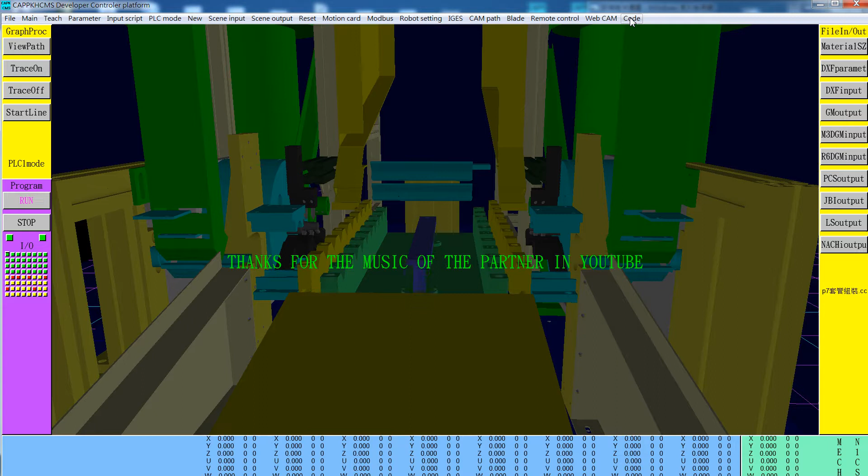Input script of a pure PLC mob assembly machine by teaching. Last time we were talking about

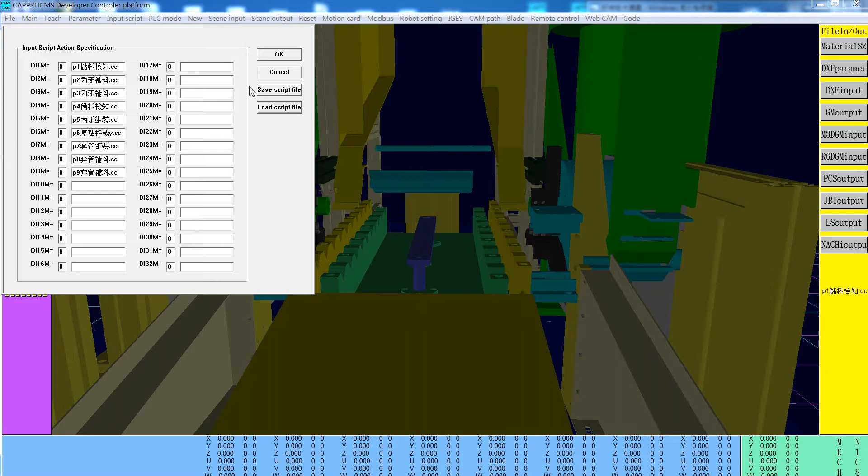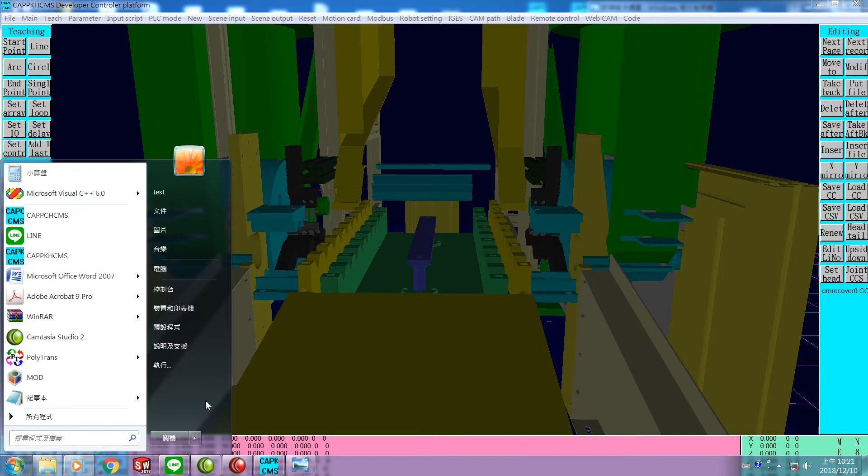We're talking about the P8 套管补料 CC file first. The number 8 control system. The script list down here, but we already output the Excel file. Let's see the Excel file as ASCII code, better for looking.

P8 套管补料 CC file combined with the cartoon chart is better for looking. The P8 is the 套管, the outfittings drop from the supplier.

And then Y17 will turn on to hold the position to prevent the dropping of the outfitting, and retract Y18 back to home position. Finish a cycle. Let's see the procedure of the script.

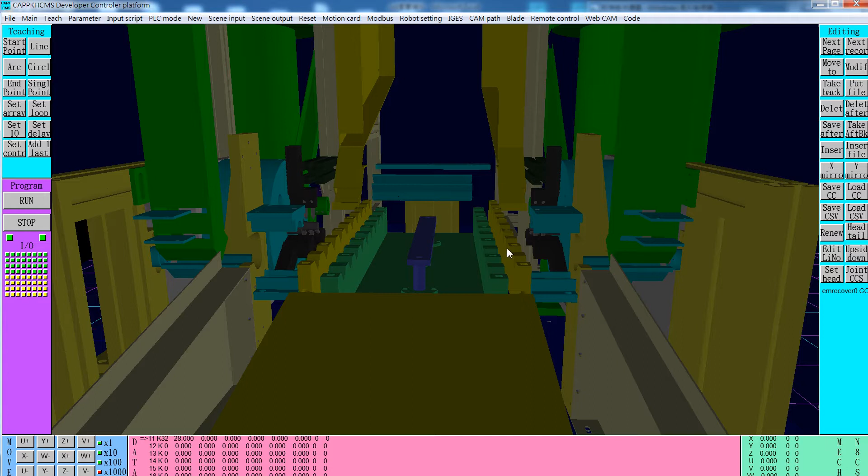But as we run it, the last one is the separating piston on. We have to, if we don't want to see this play at home positions, it's better to wait for a few minutes for observation. So we use delay to wait 5 seconds.

So you can see at the last this insert in position and after 5 seconds it will return back here. So let's talk the actions first. As running the script of P8 CC5, the cut with piston on, this one will go insert and this one will return back. In no time, this one will insert, will return back. This one will insert and wait for 5 seconds. This will go back home position as well. Okay, let's run.

5 seconds, return back. Okay, good. Let's see it again: this in, this return back. 5 seconds, this return back. This is what the P8 CC file does. Okay, let's continue to see

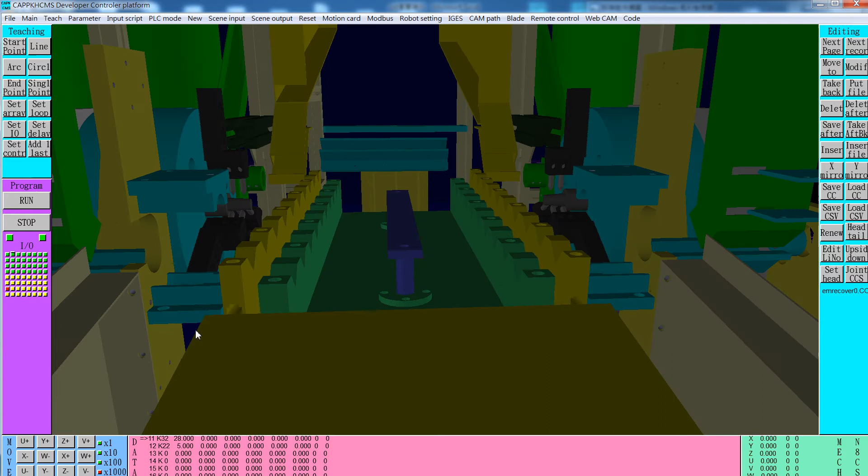the P9 CC file working. Now then, let's see the P9 casing material CC file together with the cartoon chart here. Let's say K21, the input 9 crossed,

and K20 open Y23 to cut the material, and K21 Y22 to cross the Y22. So the Y22 object will return back. This is object number 2, will return back to home position. The PLC control K20, 23, K21, 22.

For the 3D simulation, for this one, this object 1, use K26, object 1 moving minus 30 millimeters. Let's see. This direction is x minus direction.

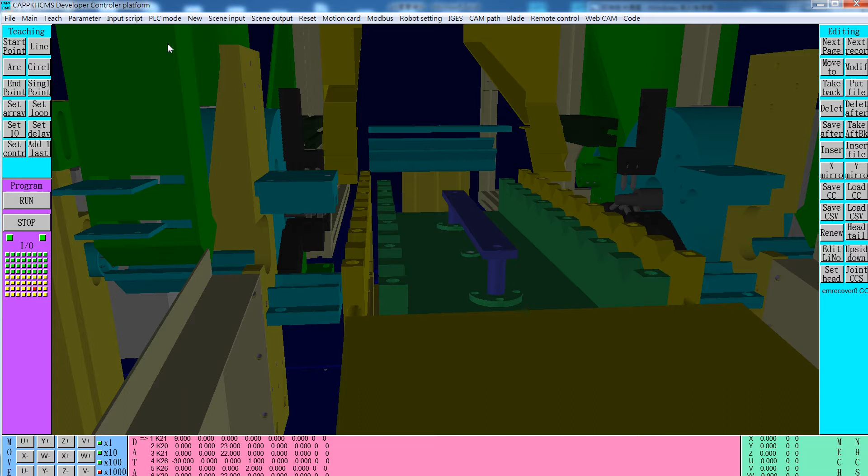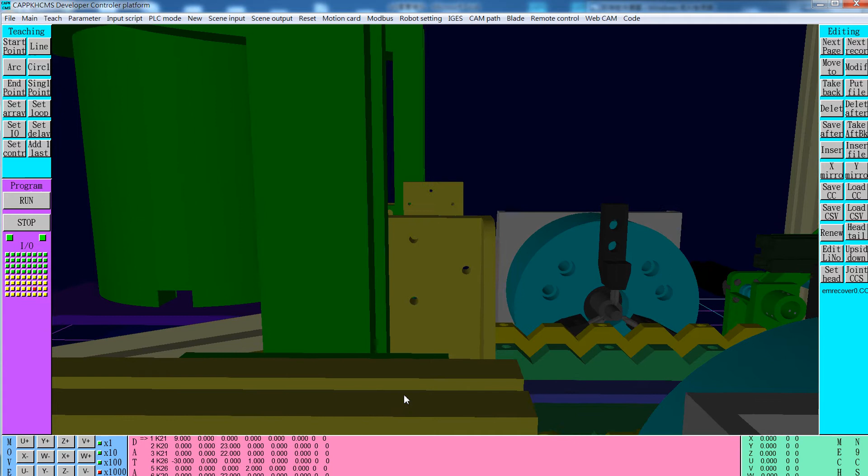Okay, then we commence to do the P5 inner tapping assembly CC file. Better to turn the mechanism 180 degrees to see in a better position.

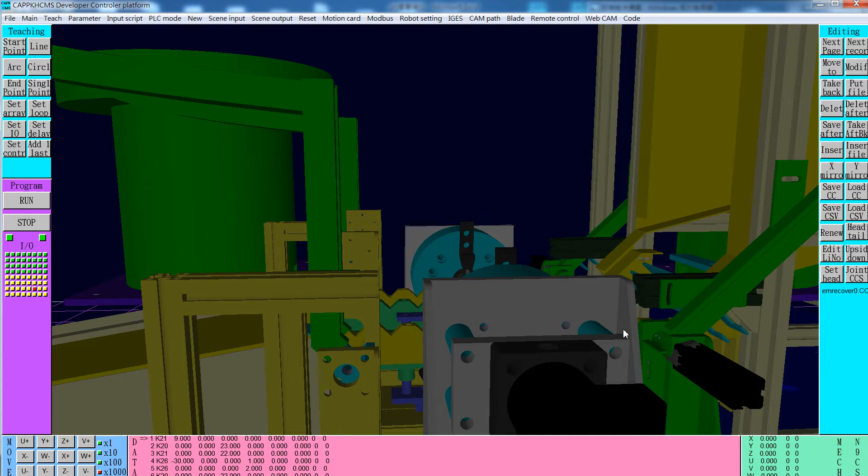Okay, the other side is blockaged. You can see it's blockaged. So we just adjust to see a better

position. Okay, this way is better. Here already fixed the channels, not like the P7 with the up and down holders to create a channel.

Before executing the P5 CC file, here is one, the other one in position. What's this one? Its inner tappings and fittings are already in position, and then the pipe, the aluminum pipe, is already on the teeth.

Okay, for P5, better to change to number 5 control system. This is the script. Then for better looking, we open the P5 inner tapping assembly CC file, this one, together with the control chart S5 to activate the P5 inner tapping assembly CC file.

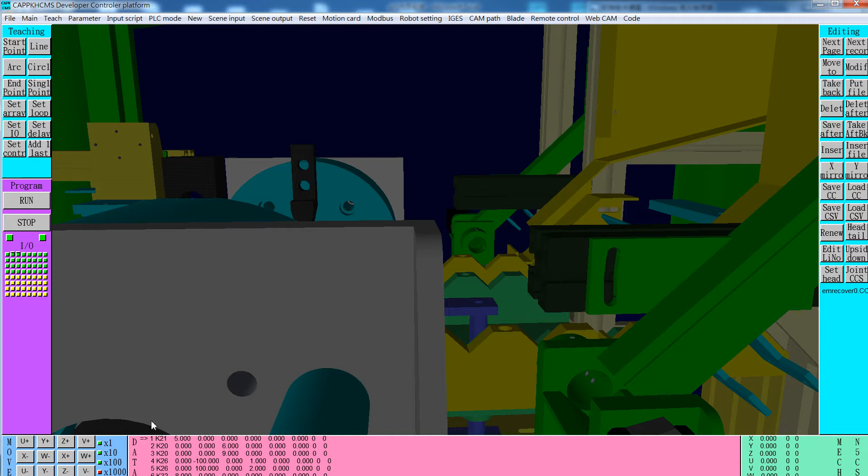Okay, this is what P5 CC file does, and then we'll see the S1 be touched. This one will lift a distance and then retrieve back, to see the P1 CC file.

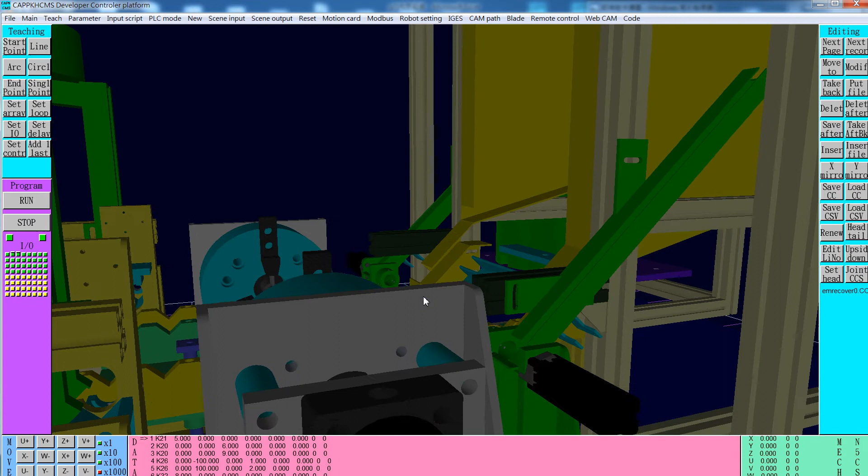Okay, then together we'll see this one running together with a control chart. The same, we'll see the CSV file in more detail. P1.

As P1 CC file executed the first instructions, use K21 to clear the input 1. Then the Y1 will be activated. K20, the Y1 activated. The 3D simulation is to move along Z direction 40 millimeters, so use K26 object 1 moving up Z direction 40 millimeters, so this one will move up.

Then waiting for input 2 to become 1 by using K32, input 2 sensor become 1. After input sensor 2 becomes 1, then retract Y1 back by using K21 Y1. The 3D simulation is K26, object 1 back. As it goes back, it will touch input sensor S1, so we need to wait for input 1 at the end.

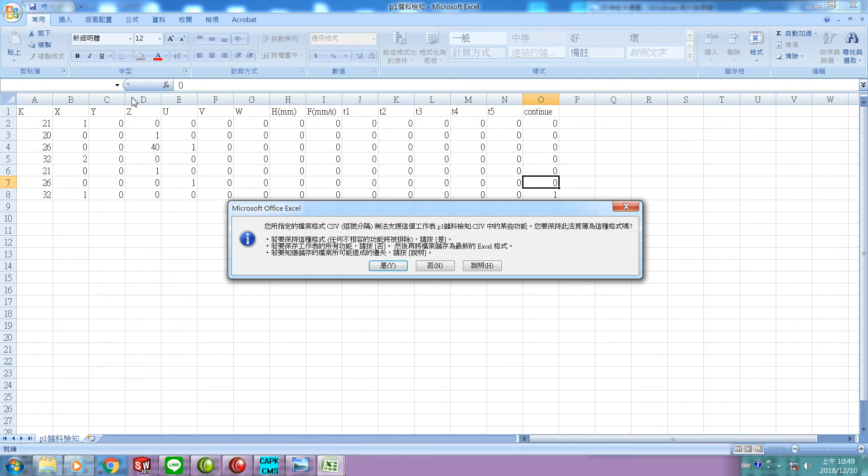Okay, then we save it again. And leave. And then let's see the simulation.

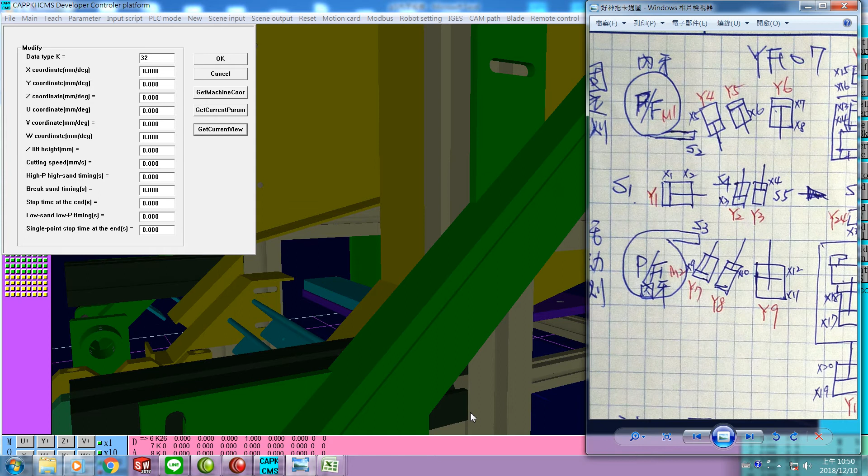The number control is 1. At the end, we have to add a waiting by using add one last, 32, waiting for what? For the sensor S1 to become 1. So this should be 1. So you can see K32 input 1.

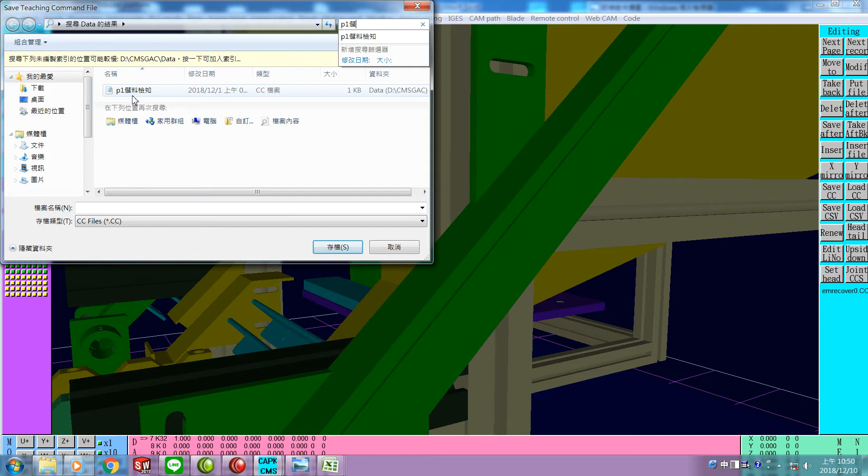So we have to save the P1 CC file by using save CC, P1. Okay, that's it.

And then let's see the simulation. Run. You see, it's moving 40 millimeters up and drop immediately. Okay, P5 CC, P1 CC already done.

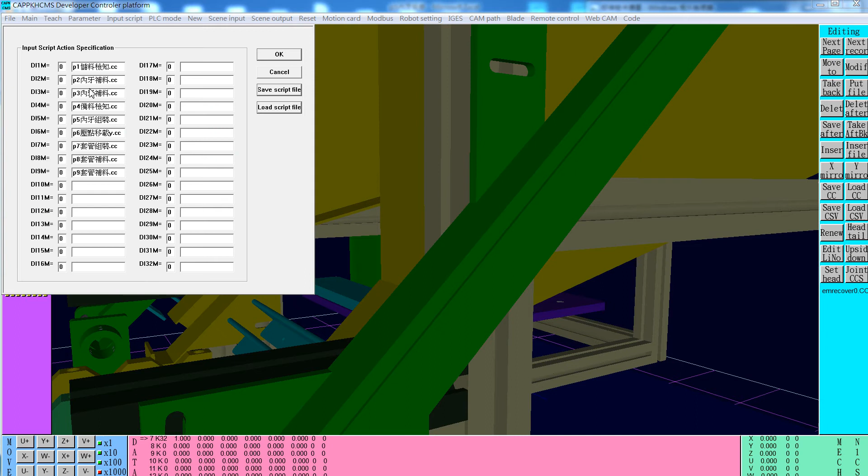At the end of P5 CC, we'll actuate P2 at the right side, to prepare one space, one freed internal tapping part in position, waiting for the internal tapping parts assembly, and S3 will prepare one at the right side.

Let's continue to see the P2. So let's change the control station to number 2. The same, let's see the P2 CC file, P2 internal feeding material CC.

The same, P2 internal feeding material. The first instruction uses K21 to clear the input, procedure number 2 become 0. Together with the control chart, the S2 actuated. The Y4 on first by using K20 Y4.

What's the meaning of Y4? Y4 is cut material. The dropping along the pipe, the slope is 45 degrees, almost. So at the top, using Y4 actuated to cut, to prevent the drop, actually to cut, to leave a single one left between Y4 and Y5. At the moment Y4 thrusts in, Y5 is thrust in as well.

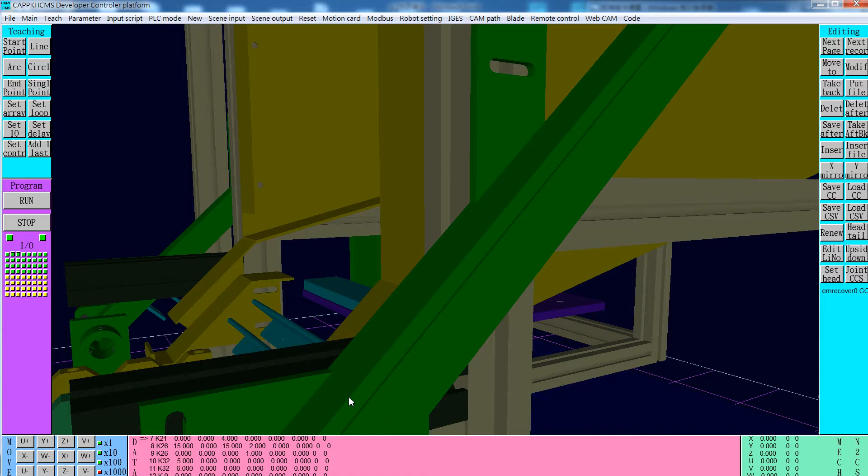So in between there is one. Let's see the joint in here at the right side. Just here, this one is to prevent the dropping. And these parts assembly already, so there's nothing waiting here. This one is to prevent dropping internal parts.

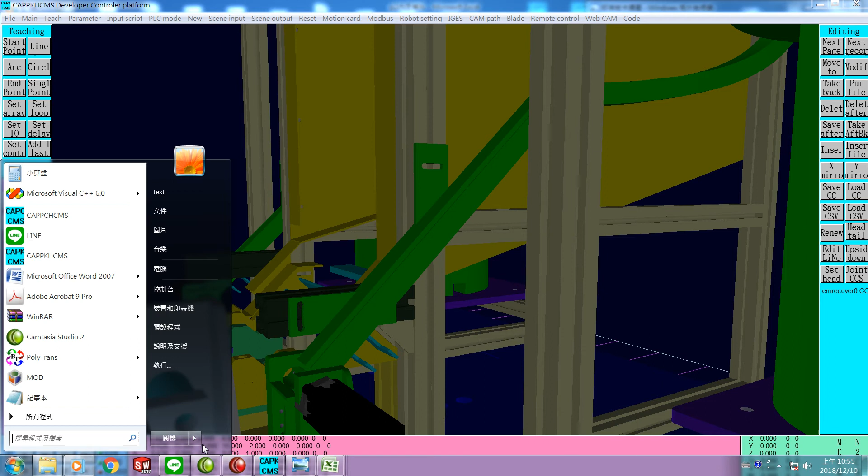And in those moments, this separating cylinder will actuate the thrust in, and the cutting plate will retract back to let the top internal part drop one in this space. Okay, let's continue to see the P2. So K20 Y4, the cutting plate thrust in, and K21 Y5 off.

This one leaving to drop the piece in between to the positions in here. For the actual movements, using K26, object number 1. Object number 1 is this one: move along X distance 15 millimeters and Z direction 15 millimeters, because this slope is 45 degrees.

For Y5, this one separating, just retract back, use K26, let the object 2 back to 0,0 positions. And there's no sensor, so there isn't any K32. Immediately the Y5,

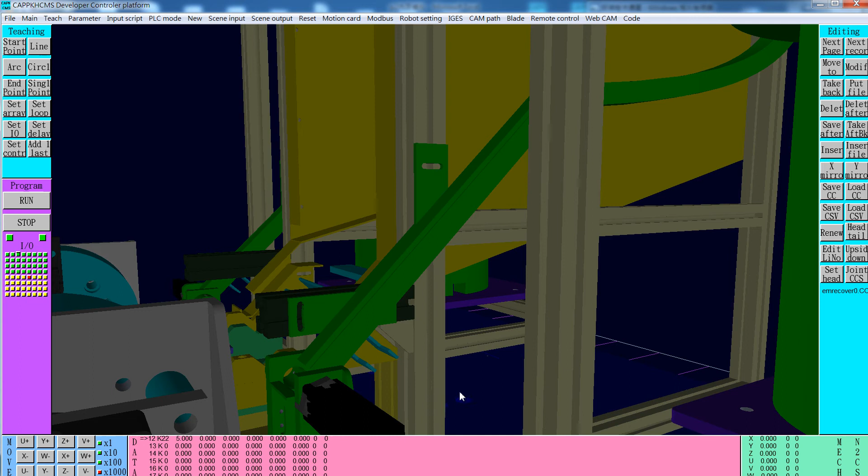Good. Then we'll see P3, in that size, the internal parts supply. Let's turn to the other view for better looking.

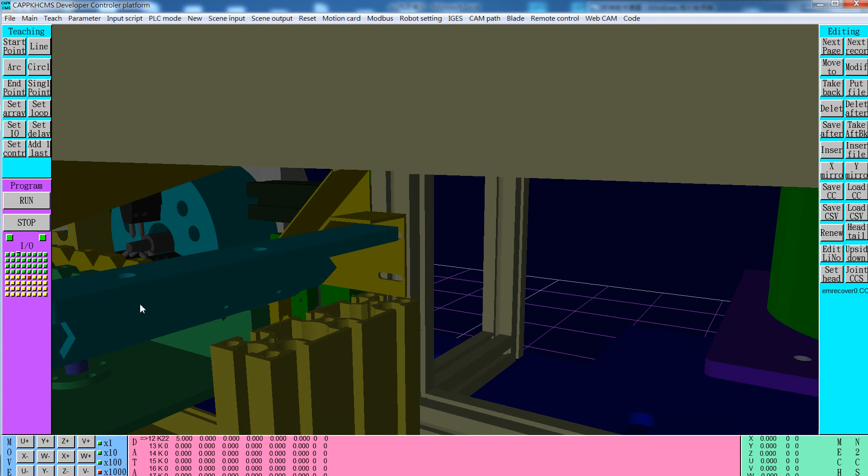Okay, just these two. It's very close, so we have to see it more closely. This one for cutting material, this one for leaving the material. The same. Let's see the P3 内牙补料 CC file.

The same, the first instruction uses K21, the input 3, that's off. Y7 will go in to cut material to leave 1 part in between Y7 and Y8. And K21 Y8, this one off, return back to lay the single one drop in the positions waiting for the assembly. The actual movement is object 1 moving along X positive direction 30 millimeters and up Z direction 30 millimeters.

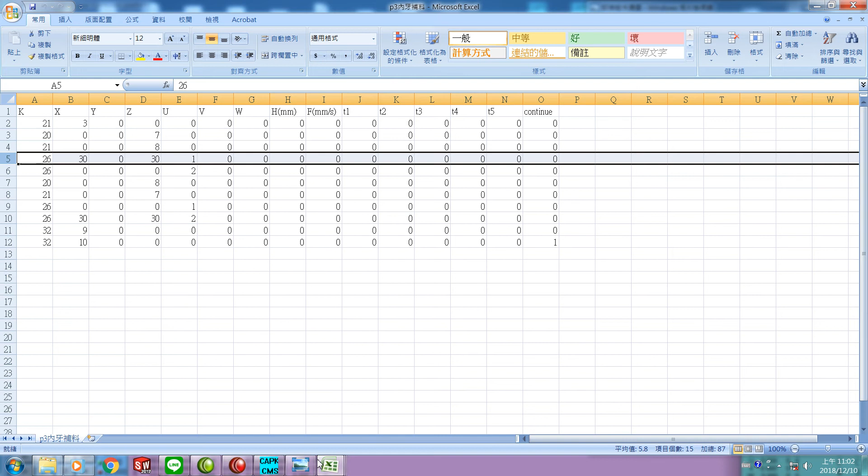This one at 45 degrees thrust in, and this one retracts back to home positions. The K26, object 2, back to 0,0 positions. And then there's no sensor, so there isn't any K32 waiting for input to become 1.

Then this one will thrust in. After thrust in, this one retracts back. So Y8 thrust in by using K20. Y8 up, and this is Y7 retract back by using K21, Y7.

The simulation is this is object 1, K26, object 1, 0,0,0, and the object 2 thrust in, K26 object 2 thrust in, the X distance moving along X positive direction 30 millimeters, the Z direction moving up 30 millimeters. Because this is 45 degrees, the Z distance and the X distance the same.

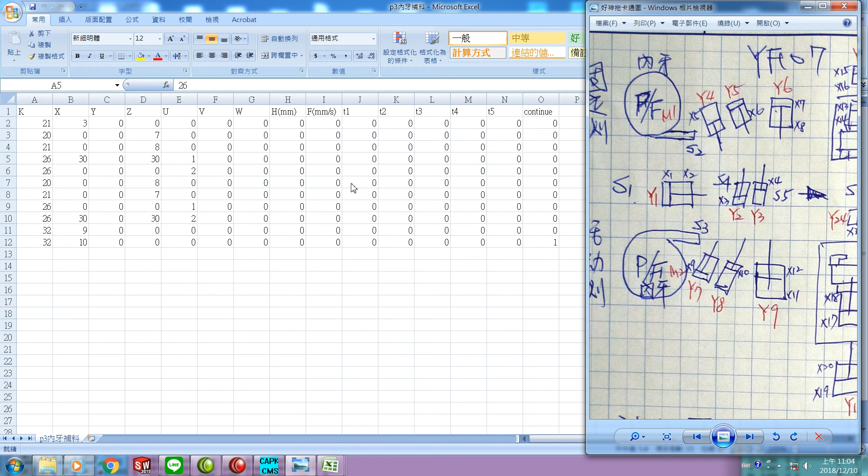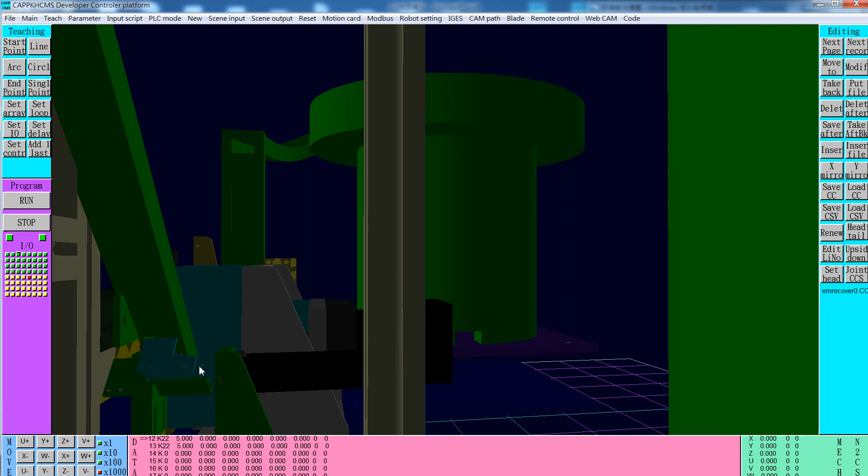Okay, let's see the simulation in here. Better to put a waiting 5 seconds at the rear before the button 1 retracts back. You can leave in positions 5 seconds. Okay, let's run it. Retract to remove this light first.

Okay, let's set it. Okay, wrong control. It should be number 3. Okay, retry. So we cannot see correct showing. It should be number 3 control system.

And the last tail, still no waiting for 5 seconds. We have to use set delay 5 seconds. Then the number 3 control system, K22, 5 seconds waiting. Okay, let's go, run it.

This one in. Before this one retrieves back, the separating cylinder will go in first. And waiting for 5 seconds, these leaving cylinders will retrieve back to home position. Okay, reset. Running again. The PLC works very fast, so we have to watch quickly.